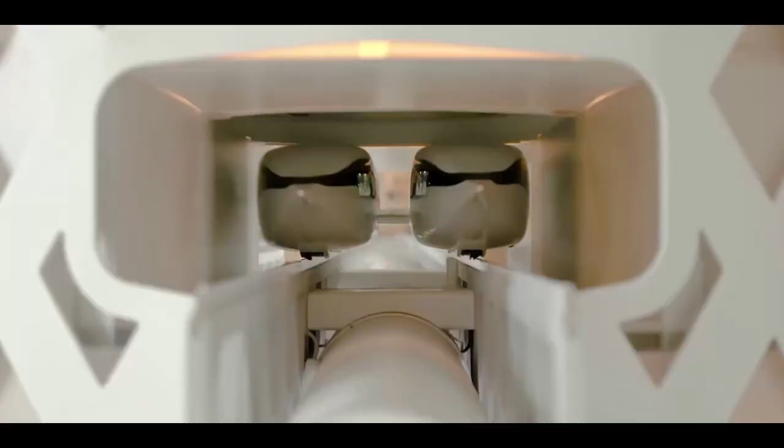Good afternoon, Anatoli. Today we're at the site of your Unitsky Center, located at the Science and Technology Park in Sharjah. The first phase of the new urban transport project implementation was presented here 6 months ago, where you showed distinguished guests and international media not only the complex in a tropical version, but also the basic infrastructure needed for it. The event aroused great public interest. At the same time, you announced further phases of the complex construction. How are things now, and what has been done recently? How is the work progressing?

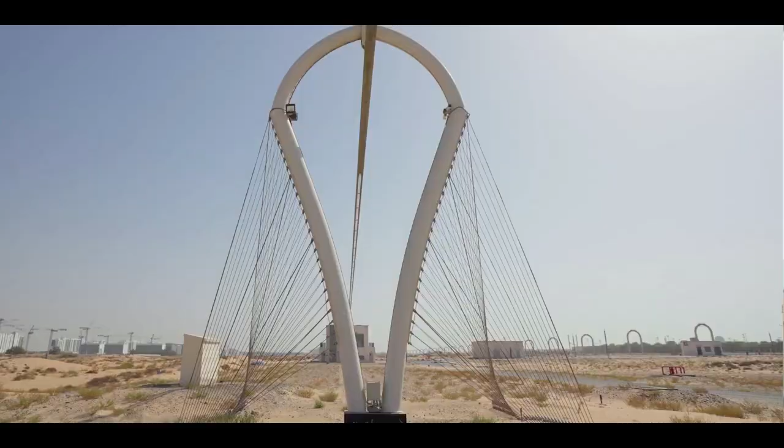We are not stopping our work for a minute. We continue with the innovative new type of urban transport project implementation in Sharjah. About a year ago, we started a pilot operation of Test Track 1 with a flexible string rail flyover, about 500 meters long. There are 3 spans here: 100 meters, 200 meters, and 100 meters, plus 50 meters each on non-tensioned sections. The total length of the track is about 500 meters.

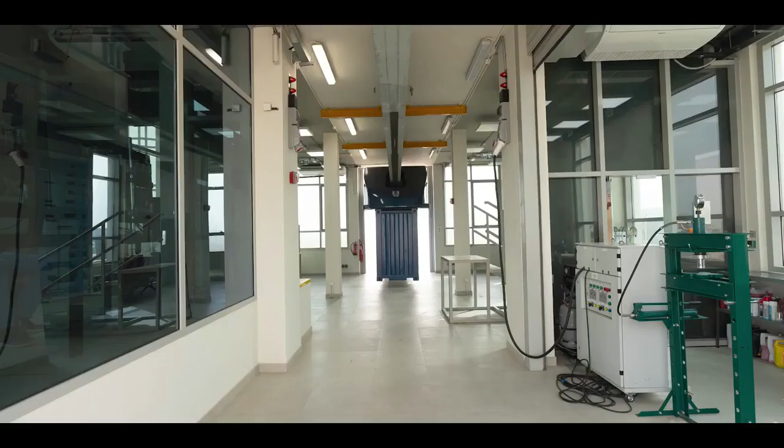Our complex includes not only freight and passenger rolling stock of the new innovative type, but also all the necessary infrastructure of the second level. These are the rolling stock maintenance stations, the passenger station, the rail string track structure, power supply and communication system, engineering networks, and other elements.

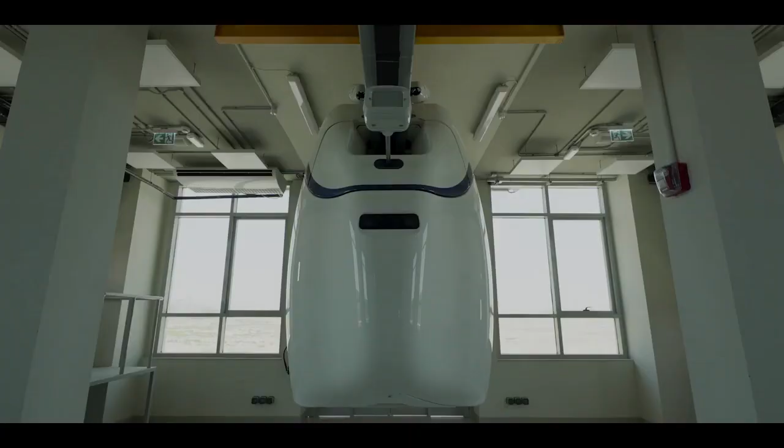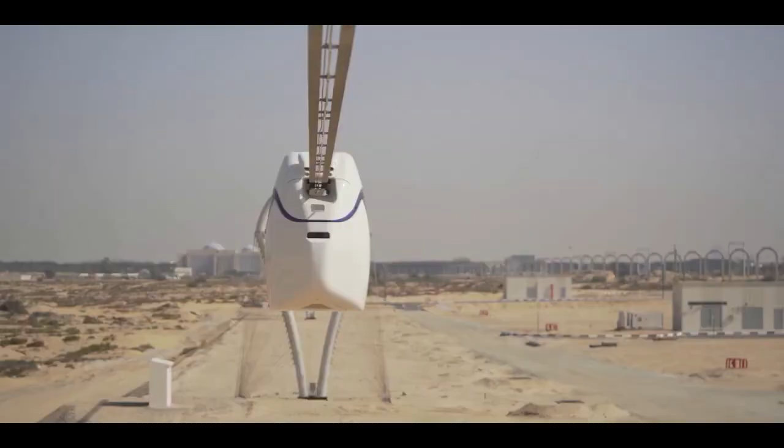During this time, we have managed, in the field, in this heat, based on real factors, to carry out tests and pilot industry optimization of all major processes, elements, units, and technical processes, to execute operating rules for automatic control systems, and resolve station maintenance issues. We also have a rail string flyover, an automatic control system, a lot of engineering networks, landscaping, and other structural elements.

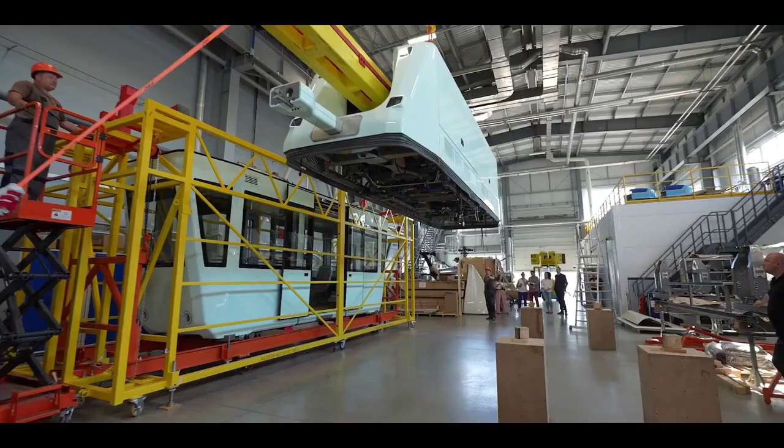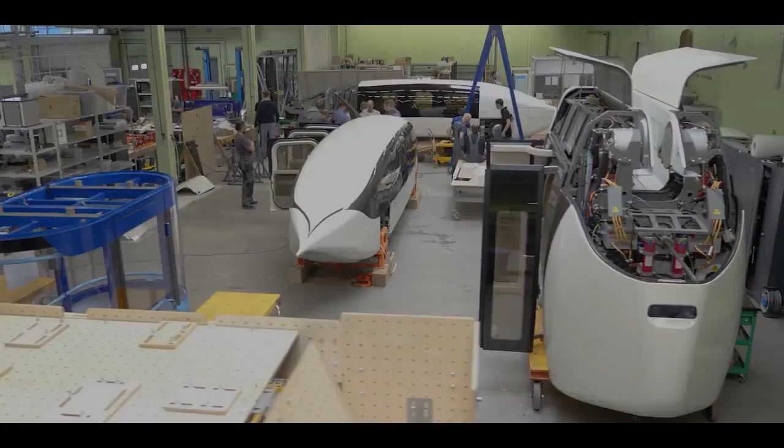The next important step was the certification of the Unitsky Transport and Infrastructure Complex in the Tropical Industrial Solution, with all essential structural elements, according to international standards in the United Arab Emirates, which we successfully completed in 2021. The requirements and standards in the Emirates are in line with those in the world. All this previous work allowed us to determine the optimal transport and infrastructure solution.

2 more test lines are currently under construction at the Unitsky Center.

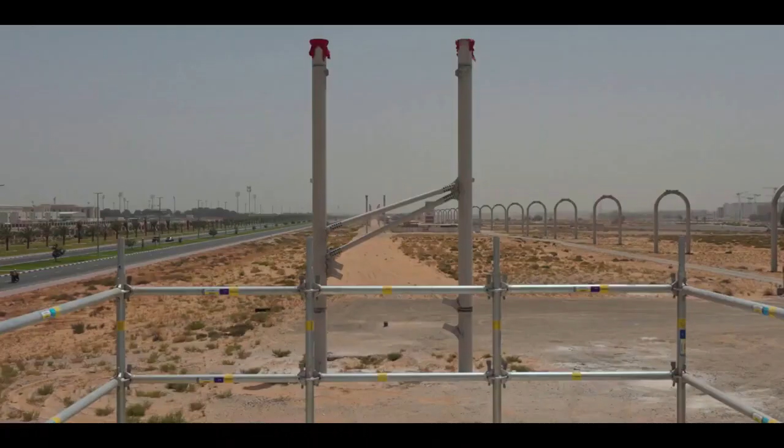Here I am at the first passenger station. It is small because it is a test station and there is little passenger traffic. By the way, here is the certificate of conformity which confirms the certification of our complex, exactly as a complex. Look how many components there are here: the technology, the nodes, the elements, the station, the supports - all that is a certified complex.

We're now going to ride the Unicar in the tropical version. We made it in VIP version because the first passenger was to be Sultan bin Mohammed Al Qasimi, the ruler of Sharjah. In fact, we have redesigned the city's 6-seater Unicar in the regular version into a 4-seater in the tropical version.

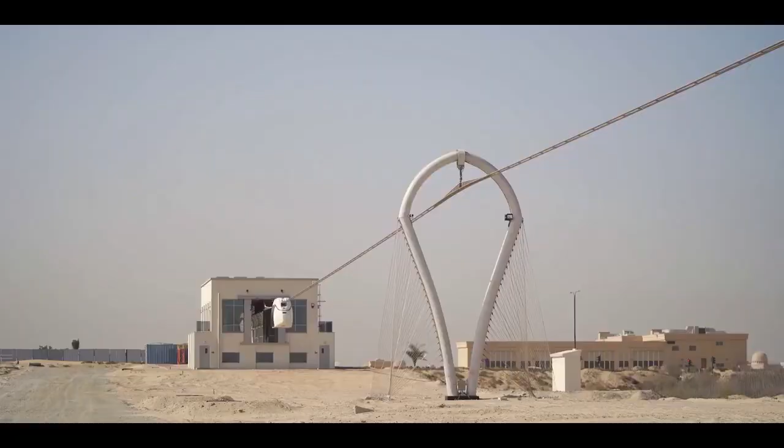We are inside the tropical Unicar. There are 2 armchairs and 2 seats for accompanying persons. The air conditioning is beefed up here, and the energy storage battery is reinforced, because it takes 3 times as much energy to cool and condition as it does to ride.

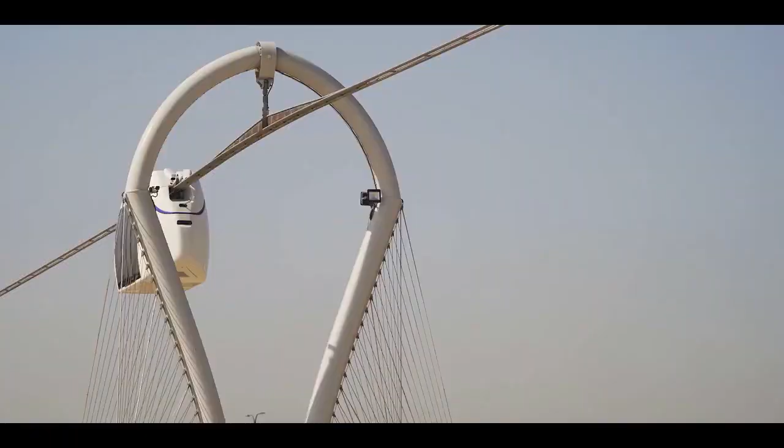Here we are now accelerating to 18, 20, 25 kilometers an hour. There is not much speed here because the track is short, all the more so as it is with saddles that are designed for 60 kilometers per hour. That's why we are passing at lower speeds. When there are city tracks, with the stations not far from each other, the speeds will not be high.

For urban lines, where the stations are not too far from each other, this track is ideal because it is very cheap. Here, the track structure, if you take the double track, weighs only 50 kilograms per linear meter. You can build our sagging-type string road from the same length of a P65 railway rail. It really is a unique system.

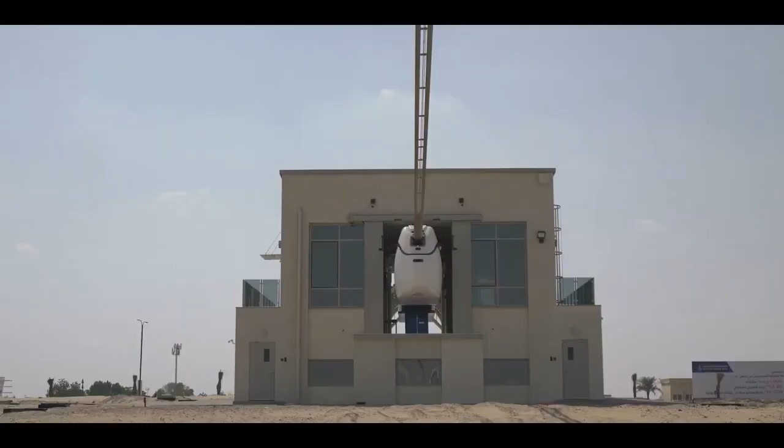When it was certified, the certifier was amazed at the parameters we achieved. In terms of efficiency and resource consumption, we have the lowest consumption of materials. The high parameters are also in terms of reliability, durability, and exposure to the full range of temperatures, as it is the tropics here, and in the sun the structure can heat up to 70-80 degrees Celsius.

The fact that we have been actually operating for about a year means we can say this is not a test operation, but a commercial one. We just don't take money for tickets, but we ride a lot of people, showing them the technology. Who has ridden the cable cars, they understand - it's heaven and earth compared to our roads.

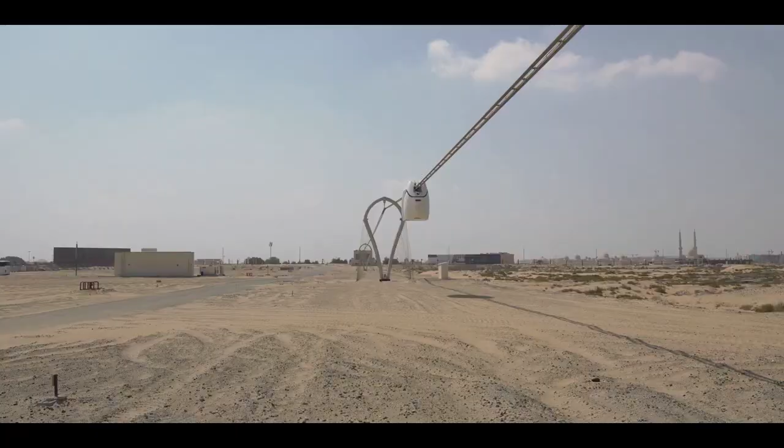In cable cars, there is an unstable rope that wobbles, especially from the wind. The speed there is generally 20 km per hour, and that is considered high speed for this type of road. The speed limit for ropeways is 40 km per hour. If you take the urban transport market, this solution, which we have been operating for about a year now, is the ideal solution.

There is also a freight vehicle standing here to transport containers. That was a unique case altogether. We were planning the track for passenger transportation.

The Unicar has a certain weight, a certain mass, and it is this weight that the track structure is designed for. But it does have safety margins, 3 times and even 5 times. The Unicar weighs about 4 tons.

When the question of how to view the cargo track came up, I decided to make the cargo container small. This could be our standard, in which everything will be included for transportation, as it's bigger than a suitcase or a boot of a car, which we also carry all sorts of stuff in. So we made a small container with a capacity of up to 5 tons. It is also in the tropical design.

At the same time, we operate both the city and freight rolling stock on the line. So the line shows that it has quite a large safety margin because the load on it has actually more than doubled. It's operating normally, in normal mode.

Our freight costs are very low, in the range of $1 per 100 tons per kilometer, or 1 cent per ton kilometer. That is, we can move a ton of cargo 100 kilometers for $1. That is why the freight market of our Unitsky system is huge. These are all countries in the world. It is the whole planet.

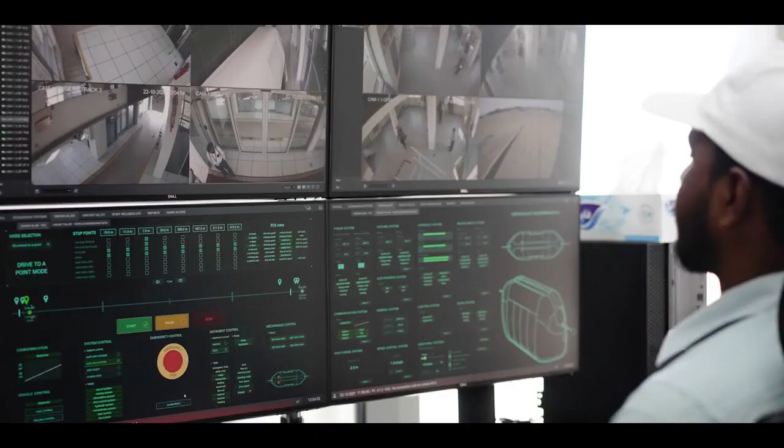Because there will be hundreds, thousands of vehicles on the track, and millions of vehicles in the road network. There will be moving at different speeds, being in different places, some of them being at the station, some of them in transit. There will also be freight transportation there. It is all supposed to be serviced in dispatch centers, where operators are supposed to monitor how everything is functioning.

Everything will be operated in automatic mode, and only in the case of force majeure, emergency incidents, does a person get involved and make a decision to avoid it. It is also our great merit because we were the first to develop a control system for the complex. Before that, there were developed control systems for individual cars, like the Tesla car. And even this system has not been finalized yet, and control system only controls one car. That system doesn't control the next car, garages, petrol stations, roads, junctions, crossings, and so on, unlike us.

The solutions are simple enough. Our dispatch room is not big, but it can serve all the complexes we're building in Sharjah, all the tracks, stations, and vehicles.

Could you tell us more about the other facilities under construction? If you take line number 2, it goes here.

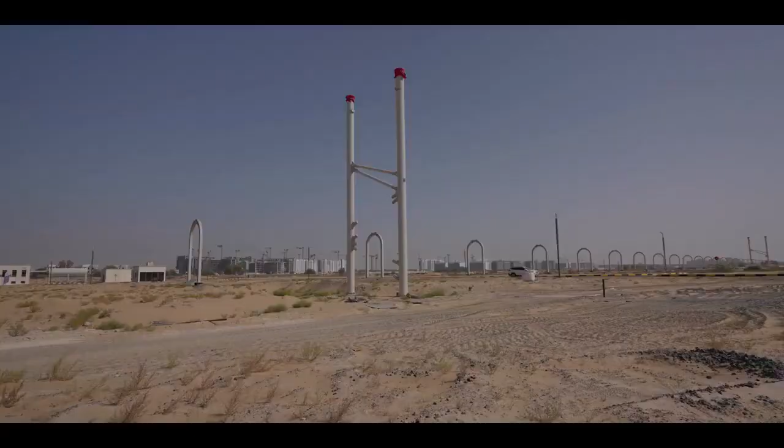If we take line number 2, we are standing virtually underneath it. The installation of 8 intermediate supports have also been completed here. They are visible. The construction work and utilities have been completed on both anchor supports. Preparation for installation of the string rail track structure has started. We can see the scaffolding here, because the installation will also go over the asphalt road, and we have to install in such a way that the installation doesn't interfere with the traffic.

The installation work of the first phase is now being completed. This is the assembly of the anchor nodes on the anchor supports. Preparatory work to connect the power supply is in progress. We have also scheduled the completion of all works for the autumn of 2022. We plan to put this line into operation by the end of this year.

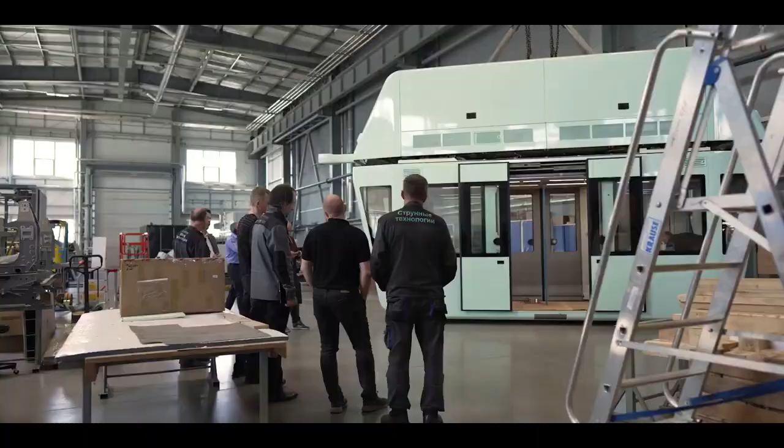At the same time, at our production facility in Minsk, Belarus, we have designed and manufactured a new urban passenger model, U-Pod. This vehicle has a capacity of 25 passengers, and it will be operated on this line. The vehicle will reach speeds of up to 150 km per hour. The line will allow to reach this speed.

So, we can say that all the works we have planned are progressing on schedule, despite all the difficulties and problems that we now have to face due to the particular geopolitical situation in the world.

You spoke about the new model of urban transport that your Belarusian team was working on. What other work is going on at your head office in Minsk now?

In Minsk, we are primarily working on commercial projects at the moment. There are a lot of them, and they are at different stages of implementation. We have to keep in mind that the project cycle always takes a certain amount of time, sometimes years. We prepare an initial quotation, and then if the client's interest is confirmed, we go out for a feasibility study, and only then do we start the design work.

This is quite a long stage. Sometimes it takes several years from the first meeting with the client to the contract. So there are dozens of directions in parallel, with varying degrees of progress.

As an example, I can cite our agreement with the Ministry of Transport in Dubai. We entered into a partnership and cooperation agreement with the RTA over 3 years ago about their needs for our string roads, and so far, they haven't even announced a tender yet. That is how long it takes to get ready for the tender. We cannot give away the project — there has to be a tender.

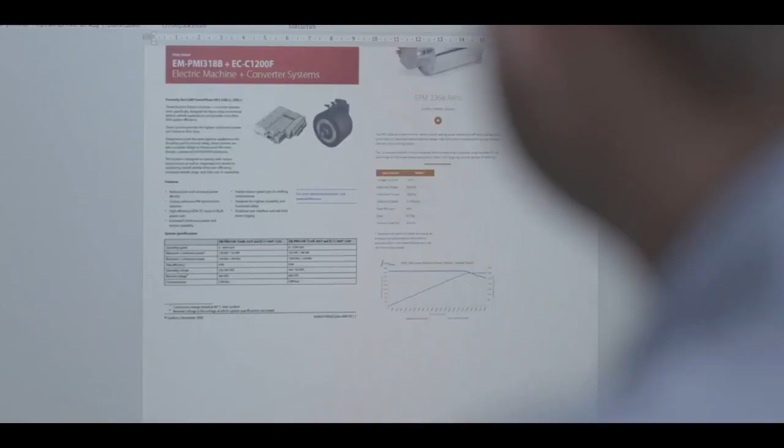As you see, even the tender takes 3 years. In addition to commercial projects and related activities in Minsk and in the Eco-Technopark, we are constantly working on improving the technology. For example, a groundbreaking new concept for the high-speed vehicle has been designed, is being refined, and it is different from and superior to uFlash in all key features, including the drag coefficient.

We have improved the aerodynamics and therefore need a less powerful engine to get the estimated speeds. We have improved comfort inside, and in the high-speed vehicle variants for long-distance travel, we will already fit a sanitary unit — there will be a toilet and a sink.

The unitization, in terms of the composition of two identical modules, has been carried out. That is, when we combine the same modules into a mini train, the possibility of establishing an additional section between them has been worked out, and then this vehicle turns into a small train with a capacity of 25, 30, 40 passengers.

We are designing new models of rolling stock whose potential in all systems meets the requirements that apply in extreme situations. The design has been carried out in full compliance with global standards for design quality, including drawing on the experience of countries such as the USA and a number of European countries, with Russia and Belarus among them, of course.

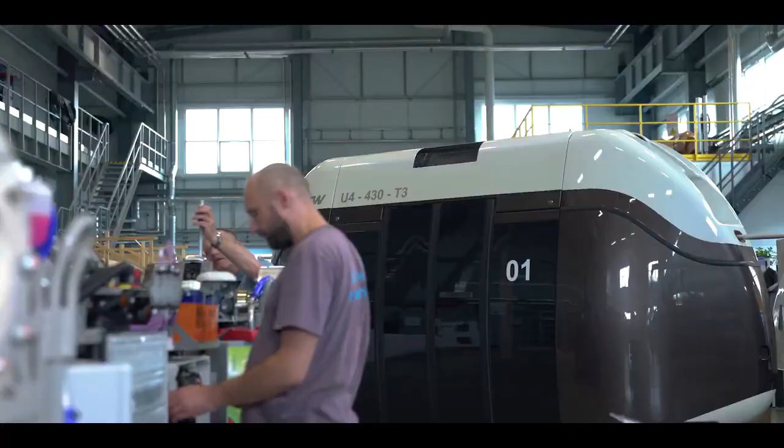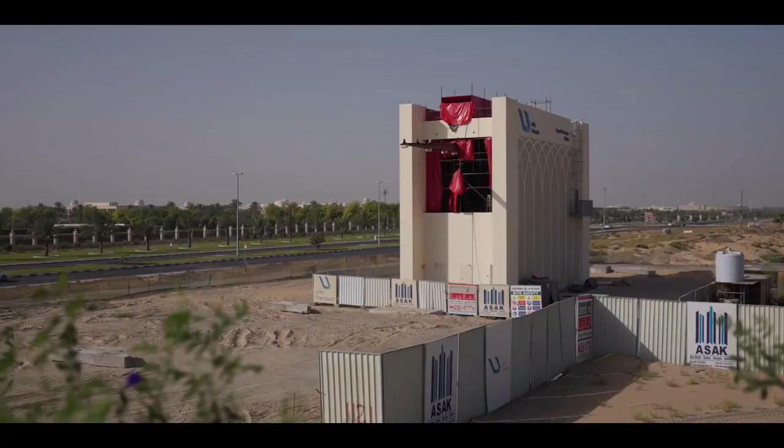Work is also underway to upgrade the running gear of the rolling stock and to build an 800-meter Line 7 at the Eco Technopark in Maryina Gorka. It will actually duplicate Line 4 in Sharjah, which I told you about earlier today. Only there it is a tropical version, and here it's for northern conditions.

And to follow up on the research topic, the news recently broke that Unitsky String Technologies has been granted the status of a scientific organization by the National Academy of Sciences of Belarus. Congratulations on this occasion. Thank you. The status gained is a testament to the expertise and scientific excellence of our parent engineering company, Unitsky String Technologies.

It was a long and systematic process that took us a long time to get there. This includes years of painstaking work, the company's extensive research, and the many nuances of the law. All this became possible thanks to the ideas, daily hard work, and professionalism of our organization's employees — thanks to the group of companies I set up, which employs around 1,000 engineers.

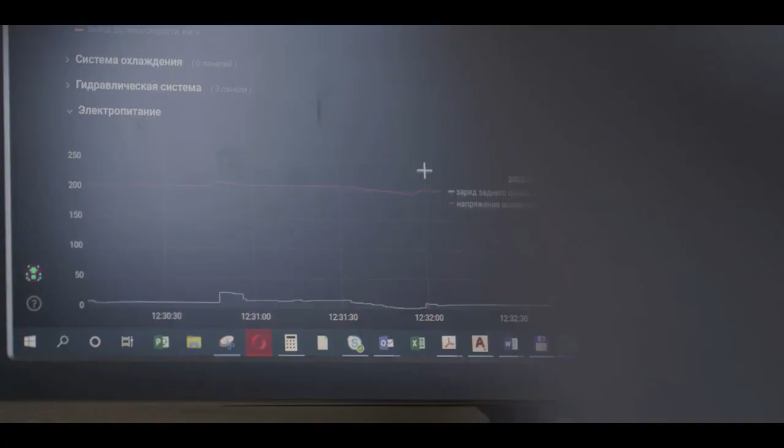Unitsky String Technologies became the 9th private company in Belarus to achieve this status in its history. There are few organizations that enjoy this honorable status. Today we have 11 PhDs, 5 of whom hold the title of Associate Professor, and more than 10 employees are engaged in teaching activities at various universities in Belarus. In the last 5 years alone, over 40 scientific papers have been written by the company's employees.

For the second year in a row, one of the priority directions for UST is to carry out R&D with state registration. In 2021, for example, 5 such works were registered. Not every research institute has this many R&Ds. 2 of these works have been completed in due course, while implementation is ongoing for the other 3.

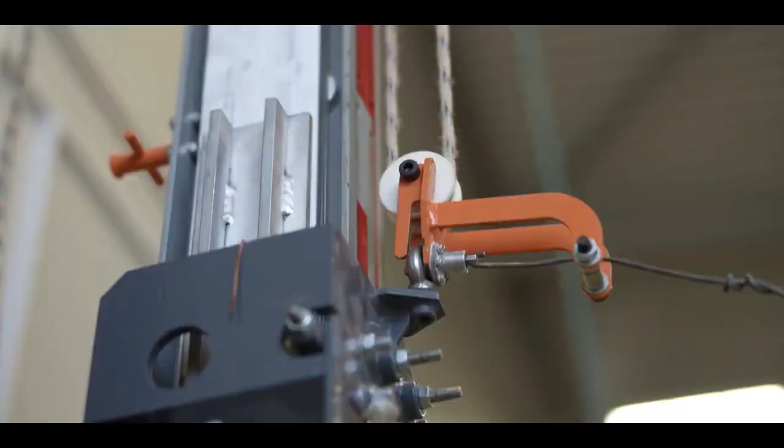3 international scientific and technical conferences have been held with the help of the company. More than 100 scientific articles and 5 scientific monographs have been published by the staff. The in-house test center was accredited in November 2020, and testing is now well underway. In 2021, a concept for the development of science and innovation activities until 2025 was approved. 5 meetings of the Scientific and Technical Council, which was set up in our company last year, have already taken place.

Over the past 5 years, 95 protection documents have been obtained for objects of industrial property rights, 2/3 of them outside Belarus. At least 100 applications have been submitted and are now under consideration. Between 2019 and 2021, 20 Eurasian patents for inventions were registered. The first European patent was granted in 2020, and 2 Chinese patents.